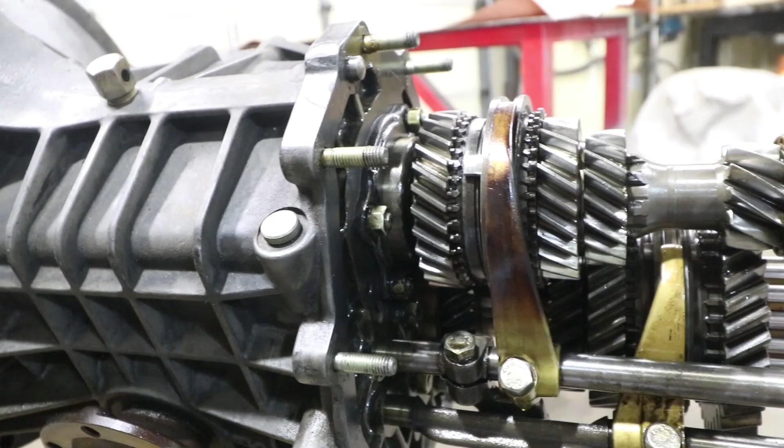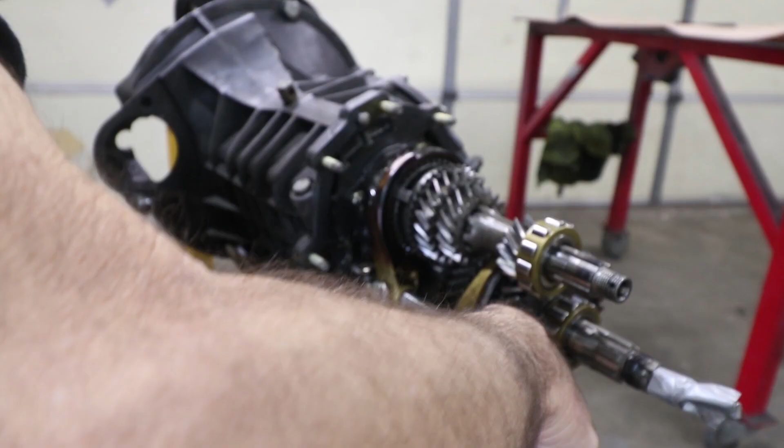I've already determined that the adjustment of these shift forks isn't great, so I'm not going to do any marking or anything. I'm just going to remove these parts so we can get these gear clusters out. My wrench has a hard time getting into that recess, so I'm going to go for the open end. There we go. I'm going to loosen this one, but I think it'll slide off anyways. This one, the wrench gets a much better grip on it. And I'm just going to put it into a gear so there's not as much pressure on the fork as I...

Guys, I tried to put this tool over the selector shafts. This is for the 741 transmission, but it just doesn't fit. It's different spacing, different diameters. So unfortunately, I was unable to support those, but we will build something later on to support those. I already took the shift detents out of this rod, which is the 3/4. Now I'm going to take it out of the 1/2, and we'll bag them separately, make sure we don't get them confused.

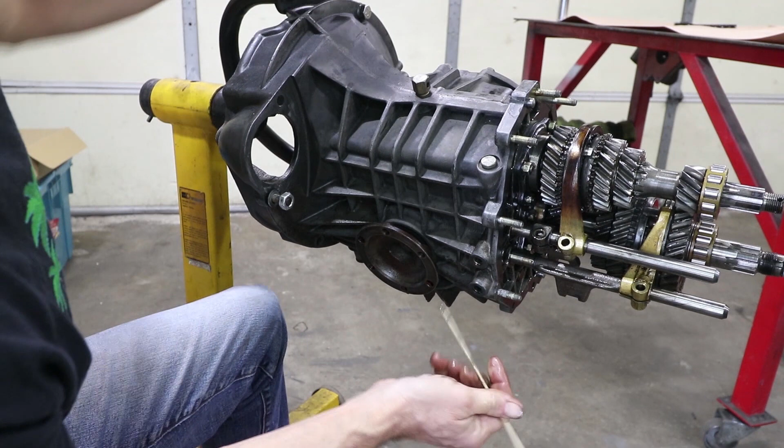You can feel something round in there. But this doesn't want to come out right now. There it is. And I'm going to put a piece of tape in there that says 1/2. That's how I like to label stuff, or put it in a bin.

Okay, this retaining plate has some 12mm nuts on it. We'll work all those loose. Be careful we don't bash the wrench into those threads. Some of these are pretty hard to get to.

Okay, these retainers are separate. And I like that they're separate because this reminds me of the 741 trans where they weren't separate and the clamping loads on the bearings were different. So I like that already. Now these clusters should just come right out.

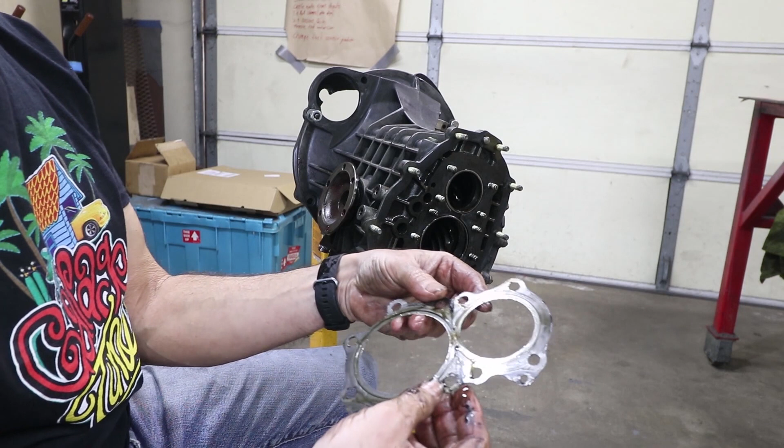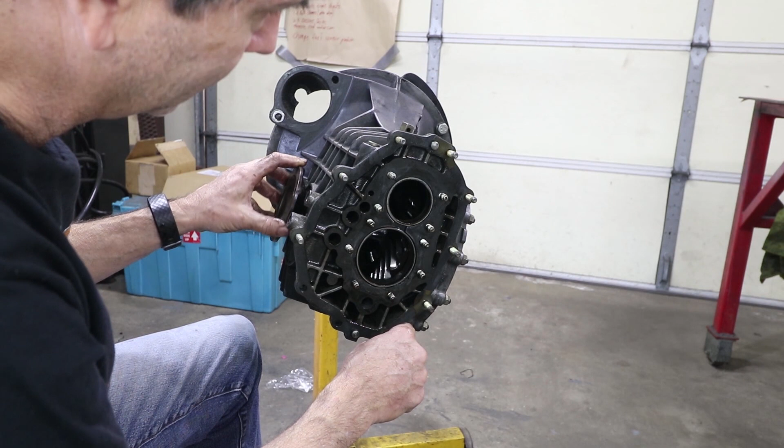So we're left with these shims, and these are the shims that set the pinion depth. So we want to be careful not to lose these or break these or bend them. You can clearly see which direction it came based on the markings. So we'll put that on the bench and start to look inside. This is the crown gear, and it doesn't look too beat up or chipped or pitted or anything. So that's good. And then also the bearing races look pretty good.

Sometimes these are really loose, and if they're spinning or coming right out, then that's bad. But so far, well, never mind. This just came right out. So that is a little bit more loose than usual. And that's on the pinion shaft. The main shaft feels a little bit tighter.

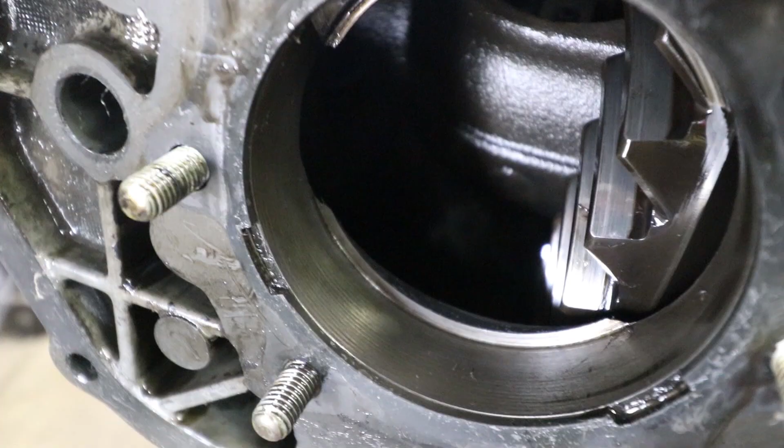Unfortunately, this is a difficult fix because it's hard to make that hole smaller without doing a bunch of machine work. So we'll have to investigate that and see. I don't see really any evidence of spinning, but it should be a press fit in there. So that's also bad news, guys. And remember, I've driven this transmission and the differential and the sound of the transmission was actually good. So I don't think there's any major problem with the ring and pinion here.

And then inside there, you can see the spider gears and stuff. They all look okay too. No major galling or pitting or anything like that. There's those numbers right there etched in the gear. That's the backlash number. So let's go look at the pinion shaft and see what it looks like. I do like how easy it is to get these shafts apart. Really just unbolts, much easier than the 356 transmission.

And the surfaces on the pinion gear look great. Nice and smooth, no pitting, nice and shiny. A little bit of goop on the end of the gear there, but this looks good. It actually matches the number on the crown wheel. 1, 2, 3, 4, 5, 6, 7. I'd actually rather have the 831, so I may change it anyways.

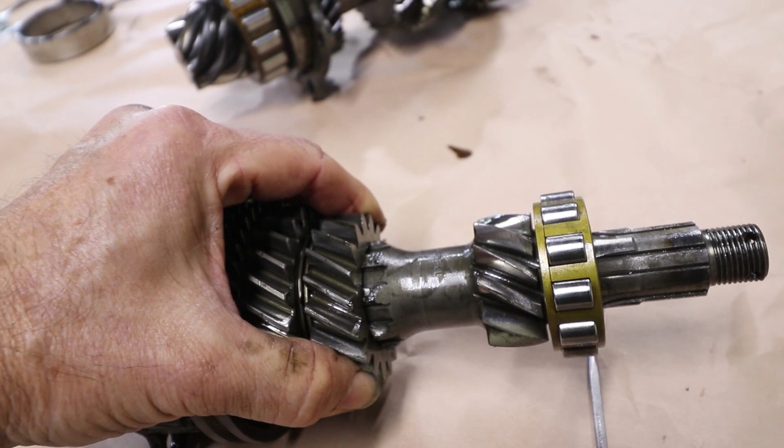This is the input shaft, and the big deal here is that this is completely eaten up. All of the splines on this input shaft that prevent this gear from actually moving. I think this is second gear, but that is not good because this has lost its hold on the shaft. And all this metal has been broken off and circulated throughout, it's just been collecting in the bottom of

the transmission. And this gear, this is supposed to move. It has a bearing underneath it, but it's not supposed to move this way. And that's one of the reasons why it was popping out of third gear. I'm gonna go ahead and pull all these gears off. This input shaft has to be replaced along with the first gear because this gear is machined on part of the shaft. So we'll replace this and this as a minimum.

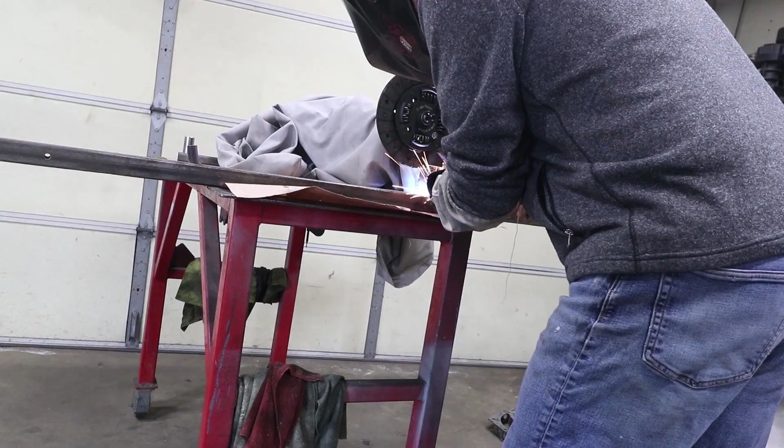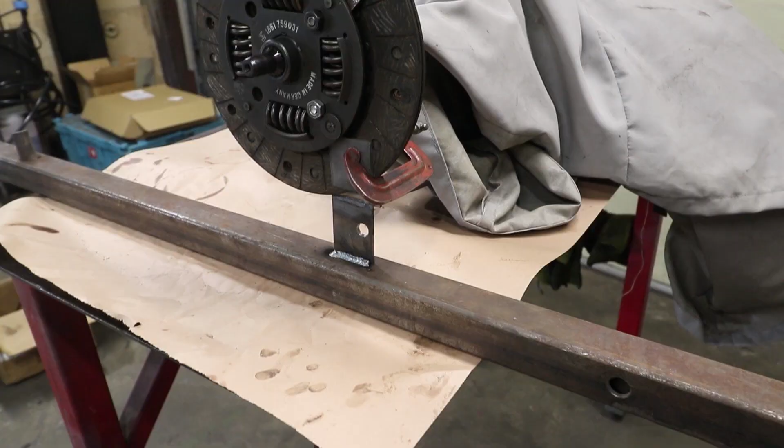It's not a garage time video without any welding.

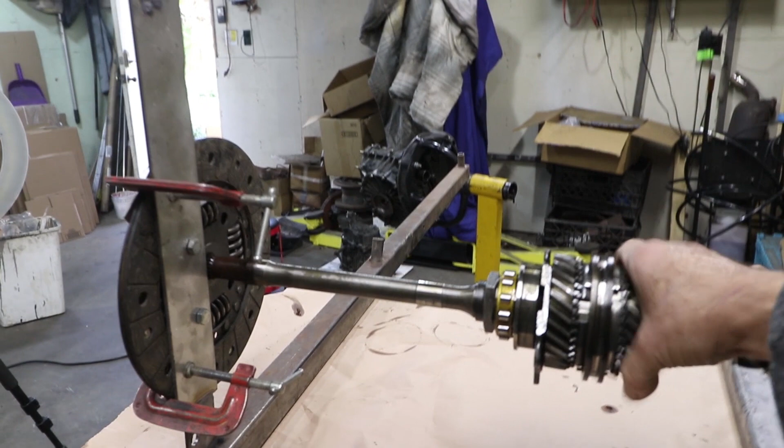So what I've done here is try to support the shaft so I can take this nut off. And I got it here attached to my vise. I'll clamp that down to the table. But basically just trying to put some torque on this and support the shaft without just clamping onto the gears. So let's give that a try.

Also, this nut has the same sort of indent on it. So I need to kind of open that up a little bit. This is not reusable.

I broke my screwdriver on that, but it's okay. Craftsman lifetime guarantee. I always abuse them for that.

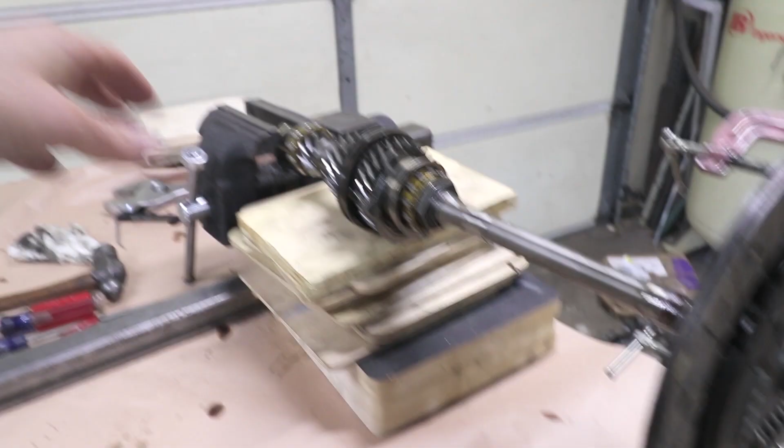And so that's open enough to where I can get some torque on it, take it off. Got it supported here in the vise. This clamps down on the nut here so it doesn't damage the threads. Gonna put a little extra support underneath here, just as I don't want the shaft to bend as I push down. And then of course, this is all kind of welded and clamped to the table. So let's give it a whirl.

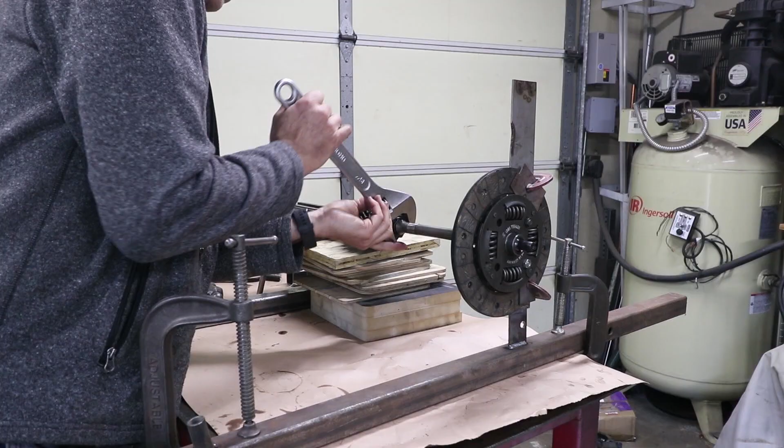Yeah, that really wasn't on there very tight. Not sure what the torque spec on that is, but that seemed a little loose to me. Probably because the way the shaft is damaged on the end there, it's probably lost its clamping load because it's broken.

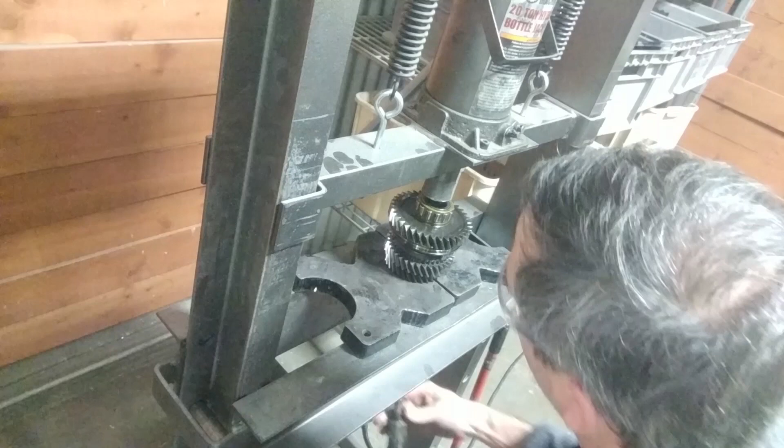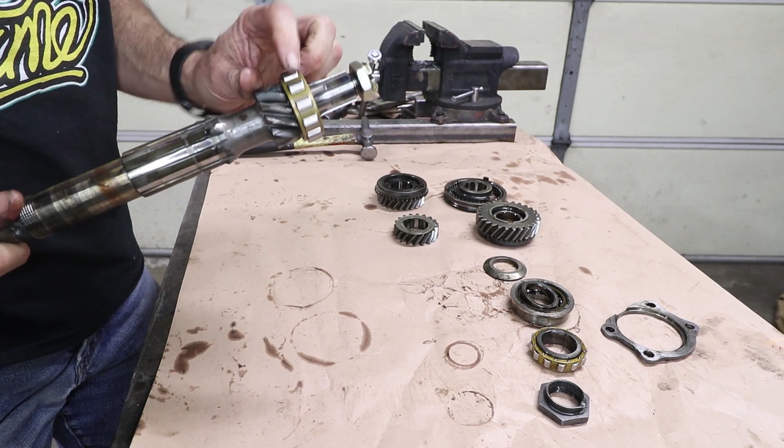Try to keep everything in the same orientation. And that's it. So we're down now to the naked shaft, although this bearing here has not been pressed off. I could get that off if I wanted to. This is the only one left that was doing anything to hold the gear on.

So it's really mangled. As the gear gets driven this way, because of the helix angle, I believe it pushes it this way. So as you put pressure on each of the teeth, it pushes it in that direction. And it must have just been a lot of lurching in second gear or spinning tires in second gear or whatever. It would just constantly bang away at that. The gear itself, I think, is okay. I don't see any damage to the gear itself, but clearly the shaft has to be replaced.

And I did consider, and maybe someone has a method to strengthen this. The later shafts have a ring that goes all the way around as opposed to each of these little notches. So it's possible to perhaps machine off all these broken teeth and weld on a much more substantial ring. That's something I wouldn't attempt on my own, but if that's a common repair for people who race, I may end up salvaging the shaft and having it repaired professionally with a much stronger ring here to support the loads

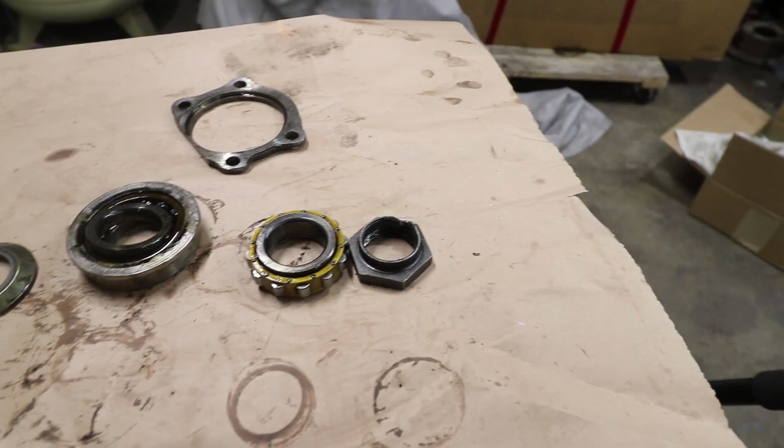of that gear. I'm going to take a video of all the orientations of all the parts, and then I'm going to drop these in the ultrasonic cleaner, and then we'll do some inspection and make some decisions as to what we need to replace and what we can keep.

It's kind of pre-cleaning some of this, and there's like synchro material caked inside here, so definitely some wear on the synchros, and that material is kind of packing itself into the little space here. So when you go to click this in gear, it doesn't snap in. It's a pretty loose fit.

I suspect this is worn as well as the synchro itself. And then this synchro on this gear looks much better. It's not as worn. So there's a much firmer snap when it goes into this gear.

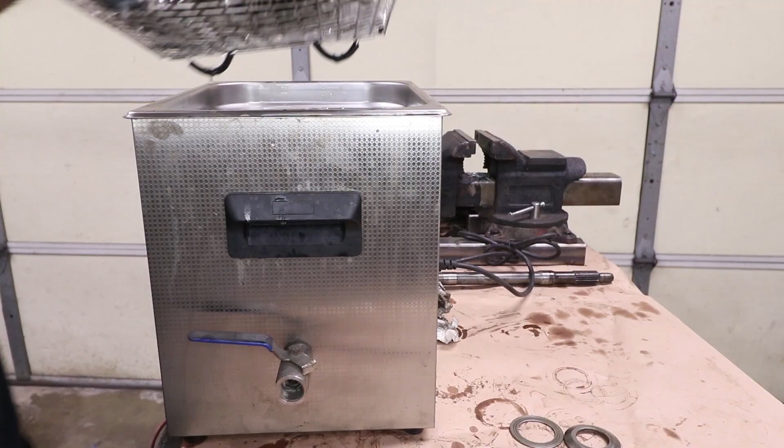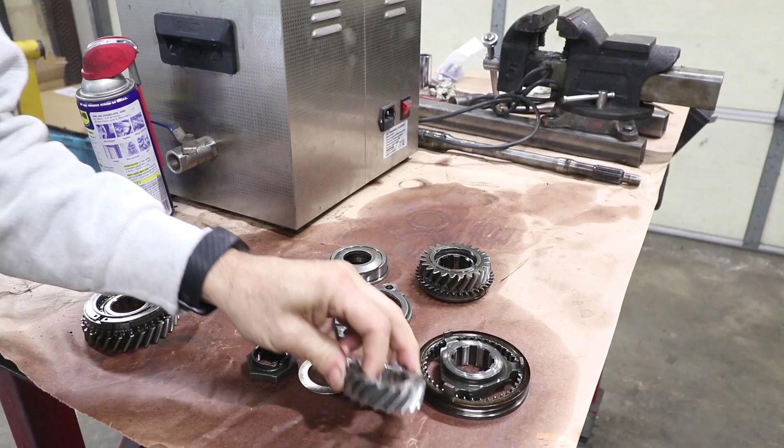Inspection time. Each of these have come out of the ultrasonic cleaner, and I've just coated them with WD-40 just to keep them from rusting and keep them nice and clean. So there's no pitting, no scratching, nothing. The gears all look great, keeping the bearings together.

This part here is the spider, and all the torque goes through this thing. And it pushes up against this piece right here. It has very little wear on it, almost undetectable. So this part is good. This part I'm not sure about yet. Don't think it's great. Everything else came out clean. The bearings are actually pretty nice. I think I can see some wear on the tips of the teeth.

So I can measure the height of the dog teeth just to get an idea. This one's 207, 207, 208, 207. So let me show you a close-up picture of this. I don't think it's horrible, but it does show some signs of rounding.

This is third gear, and it's actually a little easier to measure because it's smaller than the teeth. So 209, 209, 209, 209. This is a little bit better. Okay, this gear is from a different transmission. I get 210. These look sharper to me.

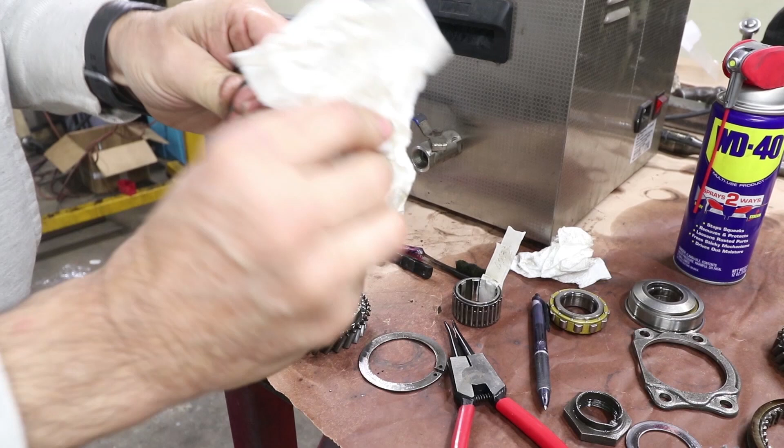Just going to wipe the WD-40 off this synchro so you can see how worn it is. Very shiny right here. Almost lost all of its crown there. And then on the inside, it has some lines, and you can see shiny spots on the lines too. So this thing is just really worn. You can also measure the diameter of these things, but I know it's going to get replaced anyways.

And then the block itself, let's take a look at this. The ends don't look bad at all. A little bit of wear marks where the synchro lines touch, but it's basically just a shiny spot. Not bad. Band looks okay. No major mushrooming or damage to the end. The internal bore of the gear looks really nice. No issues on the internal bore. Basically, it's just a question of, do I want to replace the dog teeth on this one?

Okay, so that's all the little parts. This will go together. Set it right here. 6614. So that goes in just like this. Number on this side matches the number on that side. So once again, the bearings on this one are all nice and shiny. The rollers look good. And the cage is not broken at all. It's actually in good shape. So happy with reusing this gear.

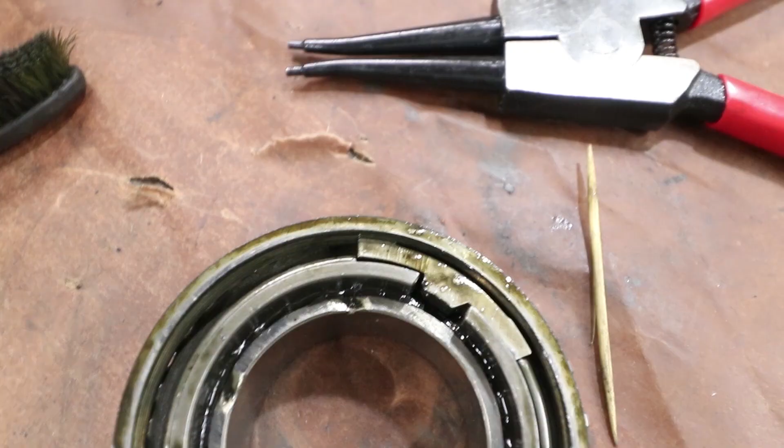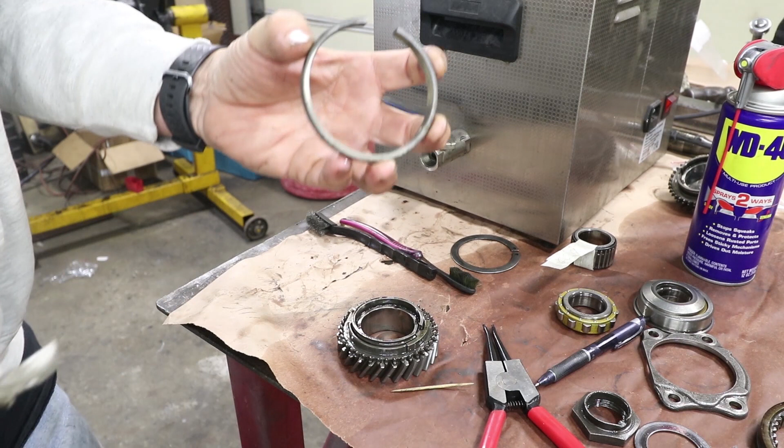And then here's a view of how those blocks are arranged, just for reference. You can see some of the coating is a little bit lighter right here on top. This one is in much better shape. And like I said, it went in and out of second gear, no problems, never grinds or anything in second gear. A little bit of sludge down there in the hole, so probably have to use some compressed air and some brake cleaner to clean those up a little bit.

The second-third slider has pretty nice looking teeth. These teeth are great. I think this is a little bit harder part than the dog teeth. The concern I have with this piece is more about the detent here where the synchro clips in. So I'm going to look for another one of these, probably another used one, or I'll look at the price for a brand new one.

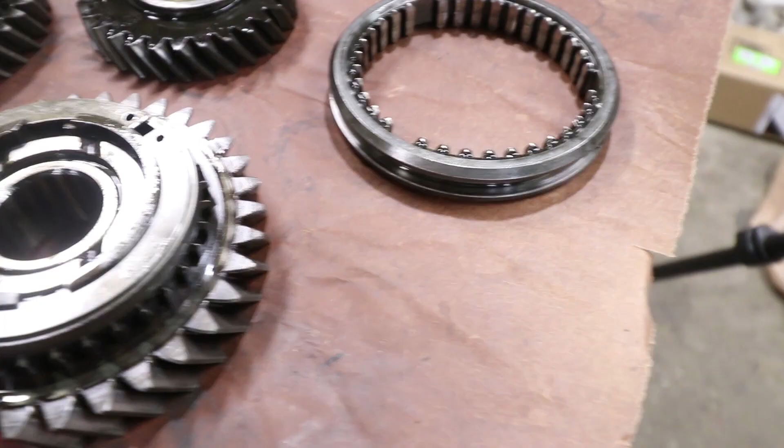And now we're moving on to the stack of parts off the pinion shaft. So these are going to go in the ultrasonic cleaner, and I'll come back and show you how the condition of these parts look. Okay, this one is first gear, and upon cleaning it up, it actually looks really pretty good. The dog teeth on this one are actually very sharp, so I'm not sure why it had a hard time going into first gear.

So this one has a directional block here on this side. I'm just measuring the height of the teeth here, 225. To me, the teeth on this one look the sharpest out of all of them. Let me show you a picture.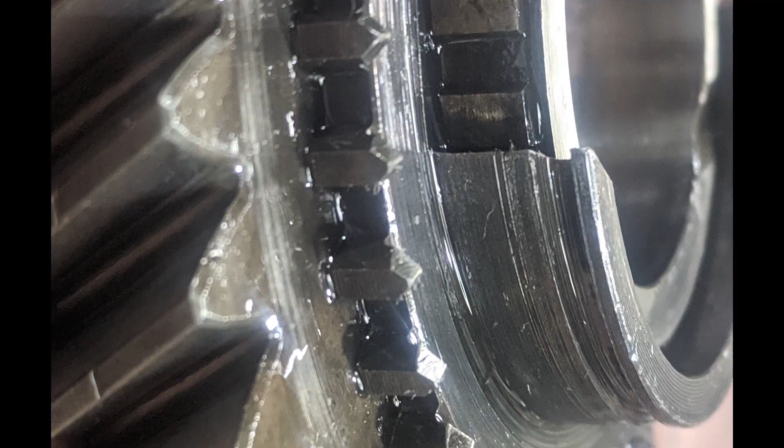I have made some decisions on what I'm going to replace. So I am going to replace the dog teeth on gears second and third. They are marginal and I think a little bit round, so they aren't that expensive. I think it's about $130 each for the dog teeth, and I think it's a worthwhile change. It's just gonna prolong the life of the transmission.

Right now, I'm gonna try to remove these dog teeth. You're supposed to have a special tool to do that. There's a tool that snaps in that groove, and then you can push it with the press. I'm gonna do something a little different because I'm never gonna reuse these dog teeth again. I can damage them as I remove them. So I'm going to probably tack weld a plate on here and just pull it off that way.

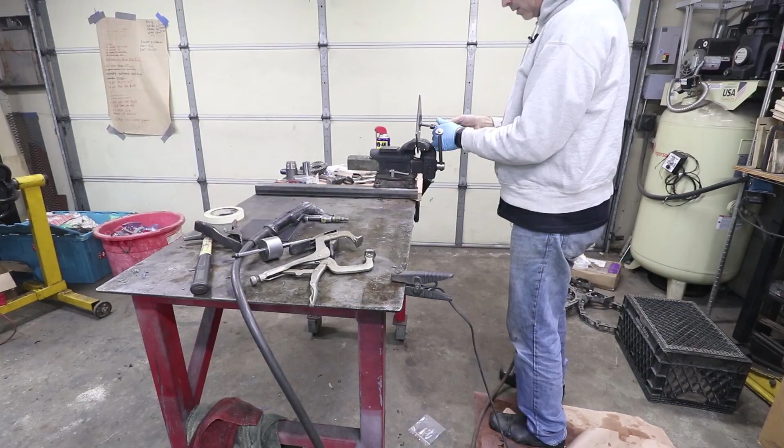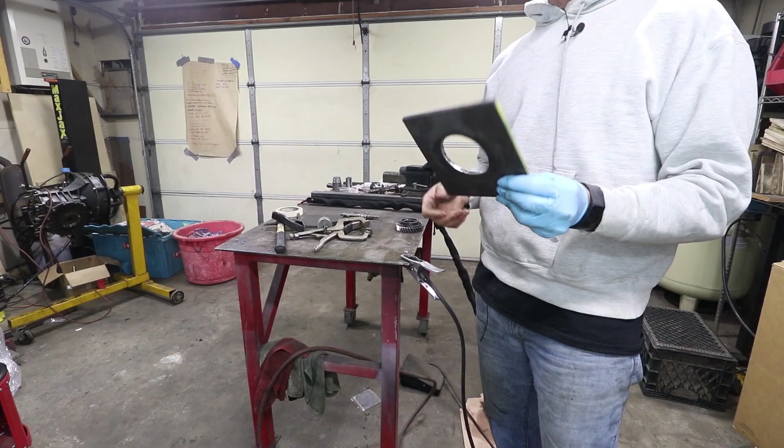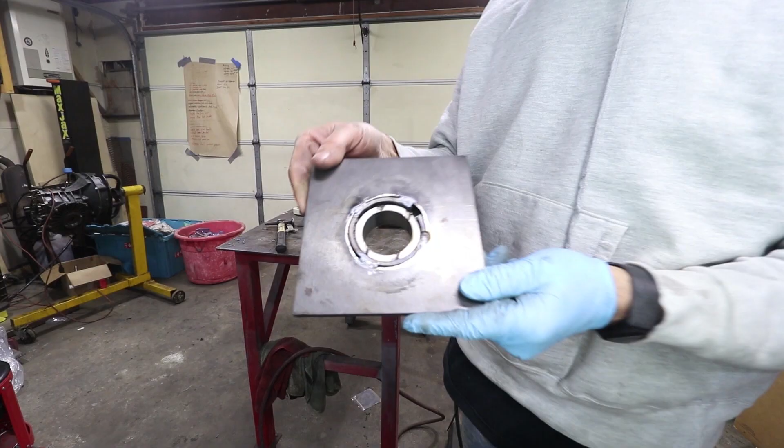I just made a hole in this plate. What does it have to do with removing synchros? Let me show you. So I've just welded this plate to the actual synchro, and it's only welded to the top of it. I'm not welding where it has an interference fit. It's only at the top. So I should now be able to use a mandrel, which I had from my other transmission, and just push this straight through. Should pop right out.

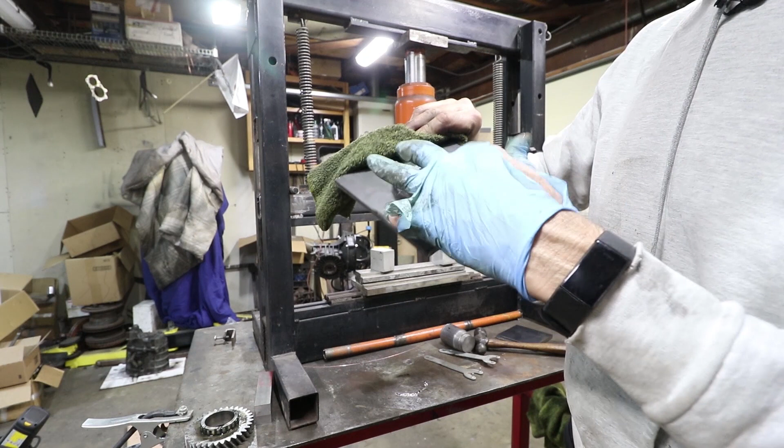No damage there to the gear. It did make a little bit of a pop, I think because this plate was bending slightly, so that plate may not be thick enough. This can just be reused and cut, but I would rather have a thicker plate because you can see it did bend. I was watching it bend, and that was giving it a little too much energy to spring back. So you don't want things to bend, you just want it to push it right off. But we got it off. Next time I'll do it a little different, a little safer.

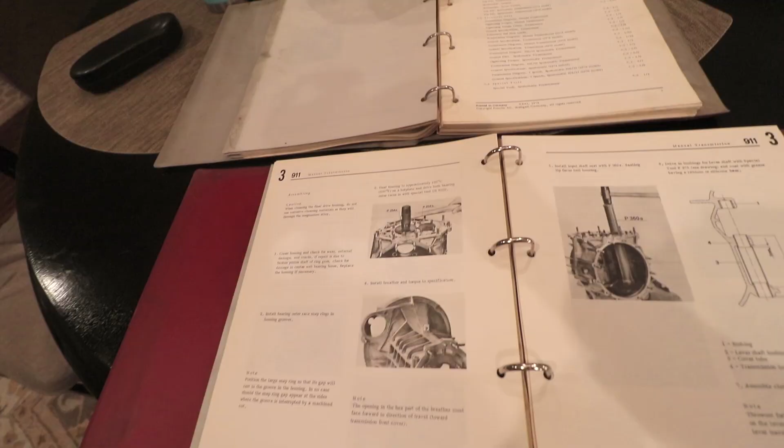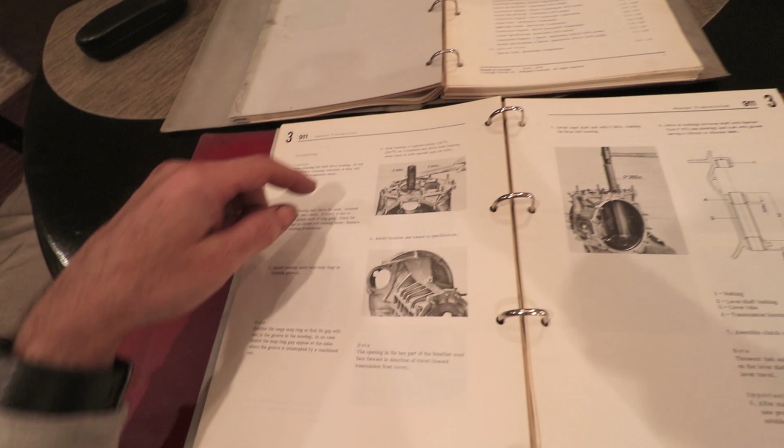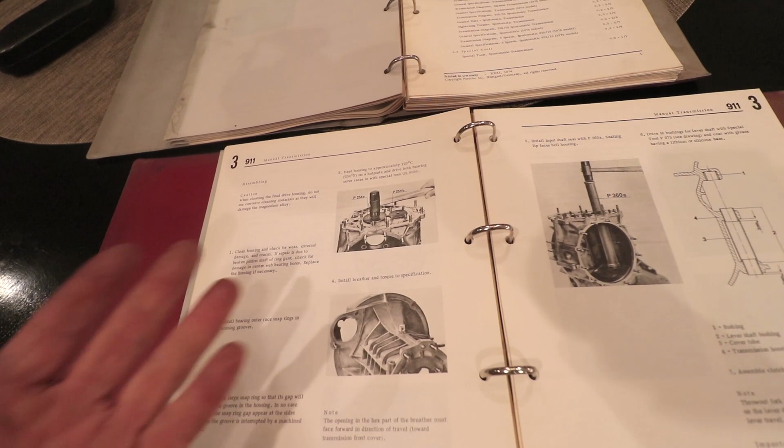I'm inside checking the workshop manual for those bearing bores in the main differential housing. And all it says is to check damage in the center web bearing bores, replace the housing if necessary. It talks about heating up the housing to 250 degrees Fahrenheit and pressing in the races, which in my case, they are pretty loose because they come out at room temperature. So there's no specifications. There's another page that has general wear and tolerance limits. Let me flip to that page.

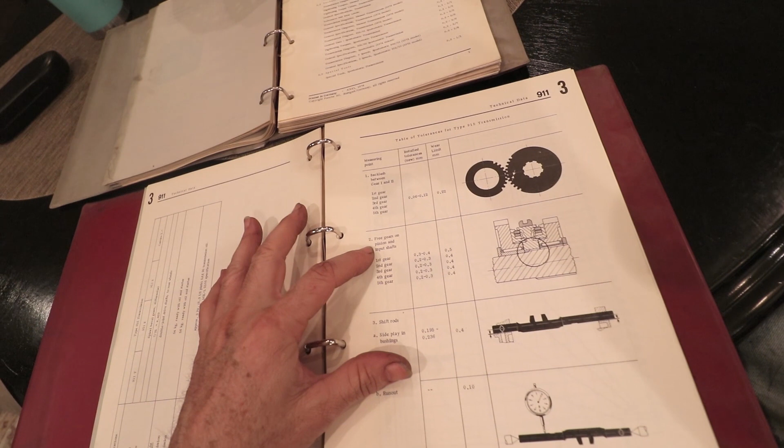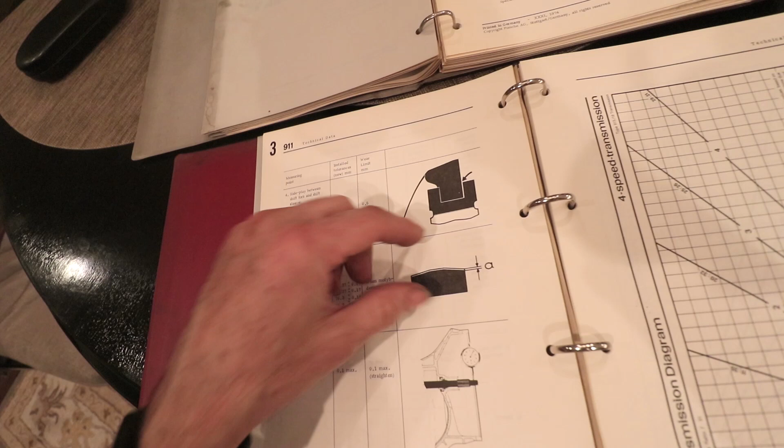Tolerances are like gear backlash, which those are fine, gears are fine. This is the roller bearing clearance or distance between the shafts and the main shafts. That's not an issue for me. Shift rods, I think my shift rods are okay. You can check the run out of the shift rods if you think they're bent. Not a bad idea to try it. It talks about measuring the side play between the shift fork and the shift slider, or shift sleeve in this case. We can go in the garage and measure that. This I haven't done yet. I want to make sure all the parts are clean.

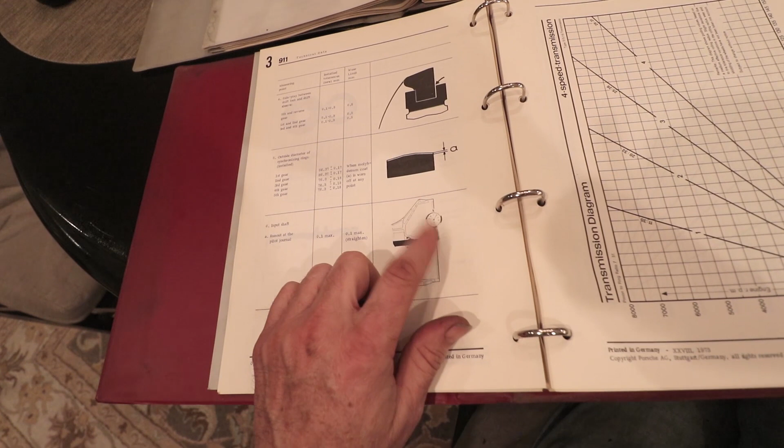If I am going to reuse the synchros, there's a diameter of the synchros when they're installed, and that's something you should check, and also the run out of the input shaft. So that's something else to check on the new shaft to make sure it's not bent before we install something like that. But it doesn't talk anything about the bores, and I don't have the little spec book, which for the 356 was really useful, but I don't know a way to check the bores to see if it needs to be remanufactured or not.

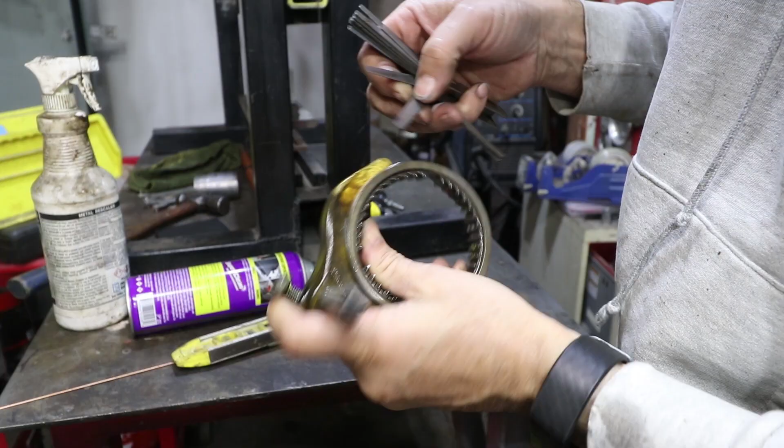And then I think most of the wear would occur here on the ends. So we just slide in some feeler gauges. That's 8 thousandths, which is the limit. I think 0.2 is the limit. So I can't get it in right there, but right at the very tip, it does go in. Let's try the 9 thousandths. The 9 barely goes in. So this selector may be worn. Well, it's not on this side. It's just worn on this side. So that won't go in.

Actually, on this side, you can barely catch it with your fingernail. Slight little groove. I'll show you guys this box here. Now, this is something I picked up over a year ago. This is an entire 915 transmission. I bought this disassembled, and it's not in great shape.

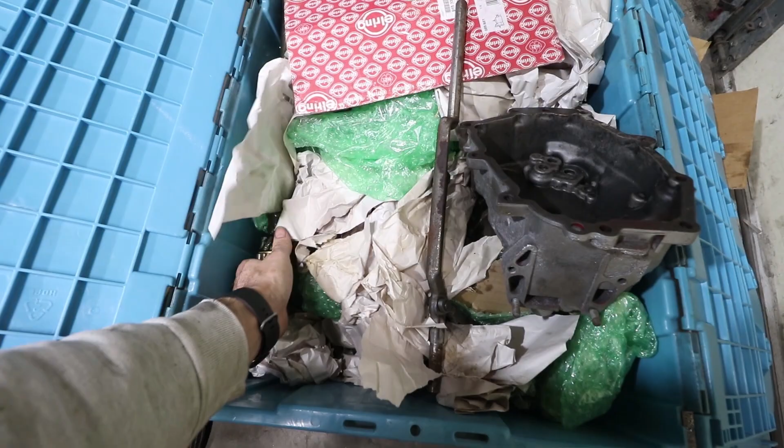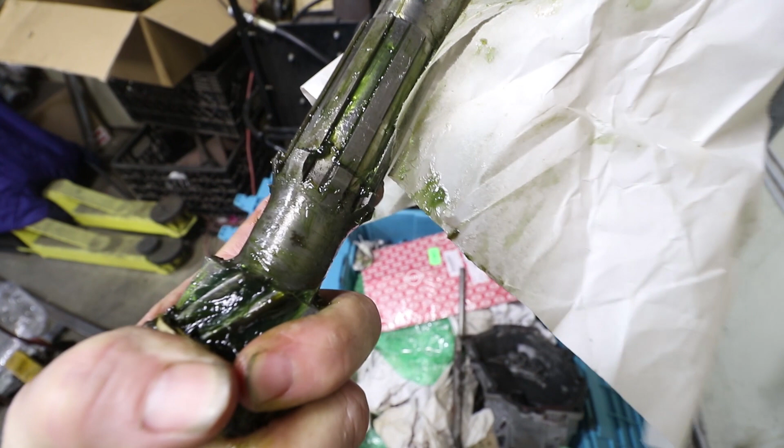Some of the stuff is a little rusty, so the danger of taking something apart is it gets rusty when it's got no oil in it. So you can see this piece here is pretty rusty, but most of the gears were in pretty good shape. And so this is the one that I need. This is the input shaft, and I covered it also with some grease, but you can see those pieces are not chipped off like they are on mine, and the gear is in good shape. The bearing can be pressed off and replaced.

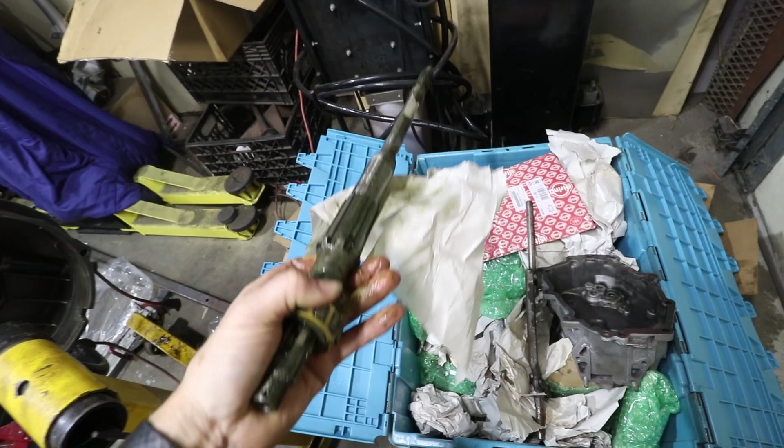So I have the first gear for this thing too. This is a complete transmission, actually with gasket set too. Complete gasket set, all the gears are there. I've gone through and cleaned some of them. Some of them are soaking in automatic transmission fluid just to get all the surface rust off of them. But this is what I'm gonna use to fix this transmission.

And the original plan was to build this into a hot rod transmission, make it stronger, use the 831. But for now, I'm gonna have to rob some of the parts to get my car back on the road, and then we'll reevaluate what it's gonna be for the hot rod transmission. These are both like 74 transmissions, magnesium cases and so forth.

I'm gonna have the housing looked at by a transmission specialist, probably here in LA, to evaluate the bore and the fit of the pinion bearing in the housing. It's not beat up, but it feels a little bit loose to me. I know that there's a clamping force when you put those carrier plates down. I know it clamps that bearing in, which is probably why it hasn't spun, but I don't know if it's a recommended upgrade on that or not. So I'm gonna have that looked at.

So it probably will be another couple weeks before you see another transmission video update, because I'm collecting parts and I'm getting things evaluated by people that know more about the transmissions than even the factory does. The factory doesn't even give you a tolerance for the bore limit there. So we're gonna look at that.